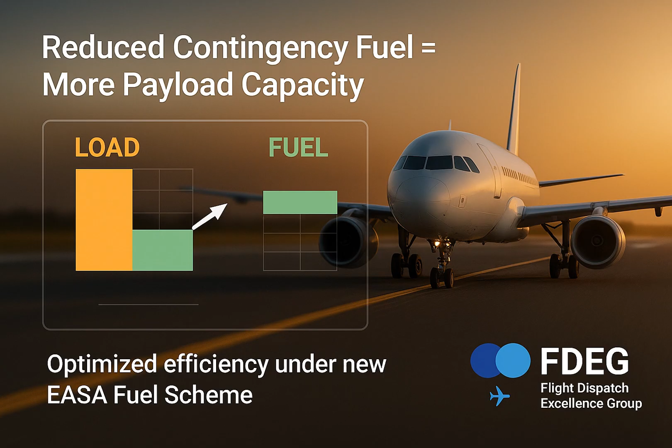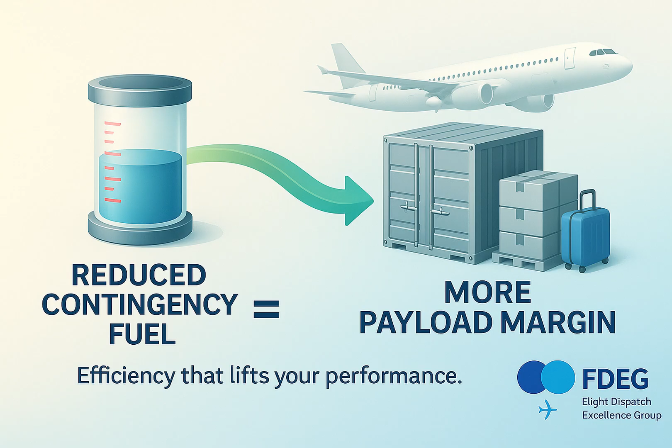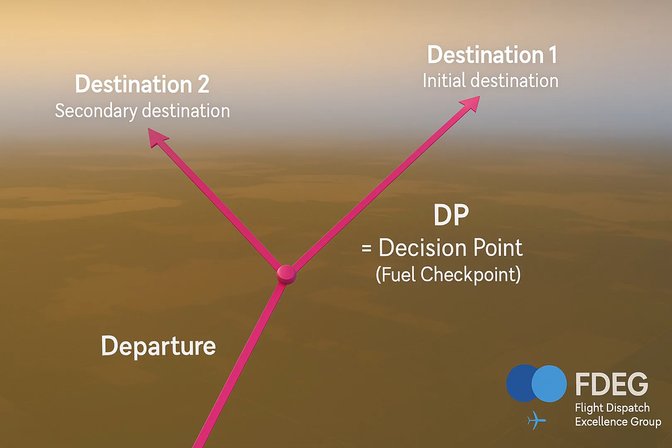What is the real added value of an RCF procedure? RCF stands for Reduced Contingency Fuel, formerly known as DP Procedure, Decision Point Procedure. It's a smart way for operators to optimize payload by reducing contingency fuel, especially when limited by takeoff mass. In some cases, using a reduced contingency fuel procedure can make a real difference by optimizing the contingency fuel and planning with a decision point. Airlines can sometimes avoid an unnecessary fuel stop, saving both time and operational costs, while maintaining full safety compliance.

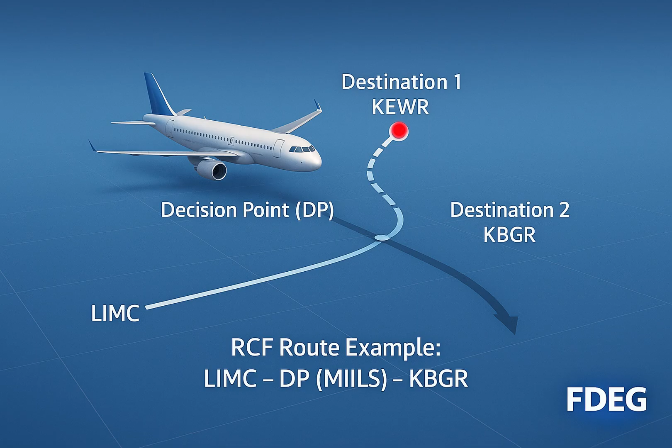Let's start by looking at Destination 1, the initial destination airport in an RCF or reclearance in-flight procedure. In our example, Destination 1 is KEWR. The operational flight plan identifies KEWR as Destination 1.

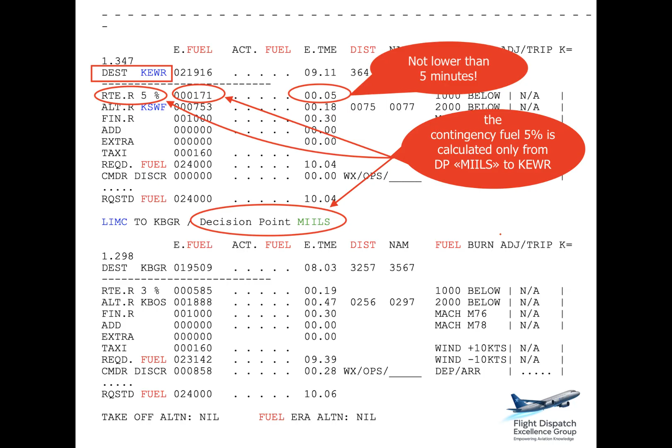A standard fuel calculation is performed, including a 5% contingency or a minimum of 5 minutes of flight time, applied from the decision point MIILS to Destination 1 KEWR. The OFP shows MIILS as our decision point. Here we can see the detailed calculation of the contingency fuel, which amounts to 171 kilograms. The 5-minute rule has been correctly applied. This contingency covers minor variations or uncertainties that may occur between the decision point and arrival at destination.

As shown on the flight plan, trip fuel, alternate fuel, and final reserve fuel are all calculated as usual. However, the contingency fuel is reduced to 5%, allowing operators to optimize the total block fuel while still maintaining safety margins. The block fuel for Destination 1 is therefore 24,000 kilograms.

Now, let's look at Destination 2. On the flight plan, we can see DEST KBGR clearly identified as Destination 2. On this leg, the contingency fuel is 3% of the trip fuel, calculated from departure all the way to the Destination 2, KBGR, Bangor International Airport. And in this case, it's 3% or 5 minutes, whichever is higher.

The required fuel for Destination 2 is 23,142 kilograms. In this example, the system automatically adds the difference between the block fuel of Destination 1 and Destination 2 under the captain's discretionary fuel line. Remember, the greater of the two block fuel figures always becomes the final block fuel to be uploaded.

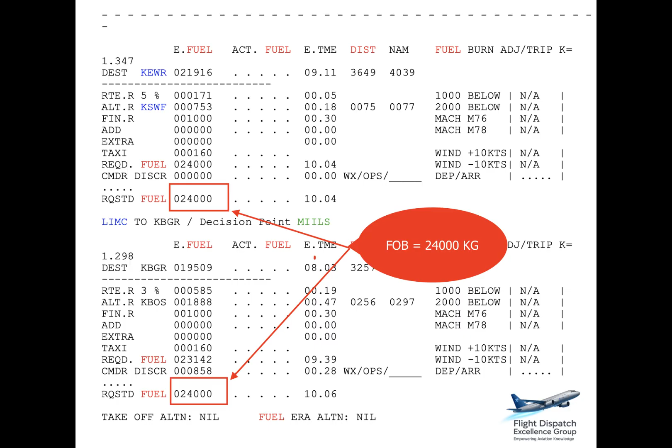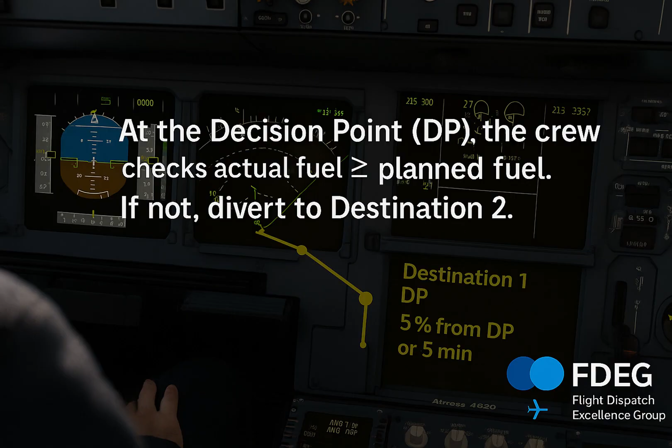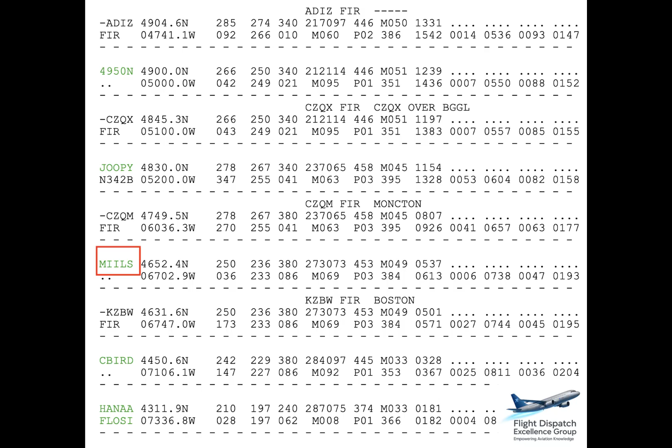Here, MIILS, as shown in the flight plan, is our decision point. The crew verifies that the actual fuel on board is equal to or greater than the planned fuel. Using the FMS, the crew cross-checks that the actual fuel on board, here 4,700 kilograms, matches the value planned in the flight plan.

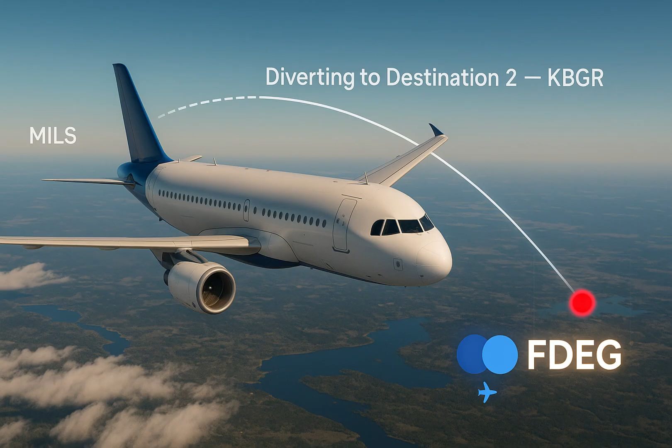Once the fuel check is successful, the captain announces, 'Proceed to Destination 1.' Otherwise, the crew must divert to Destination 2, KBGR. These rules ensure that the RCF strategy remains compliant, efficient, and fully aligned with EASA standards.

Also note, when operating under reduced contingency fuel procedures, no destination alternate is required for either destination as long as the remaining flight time from the decision point to Destination 1 is less than 6 hours. In this case, the requirements of AMC2 CAT.OP.MPA.182 regarding no destination alternate are met.